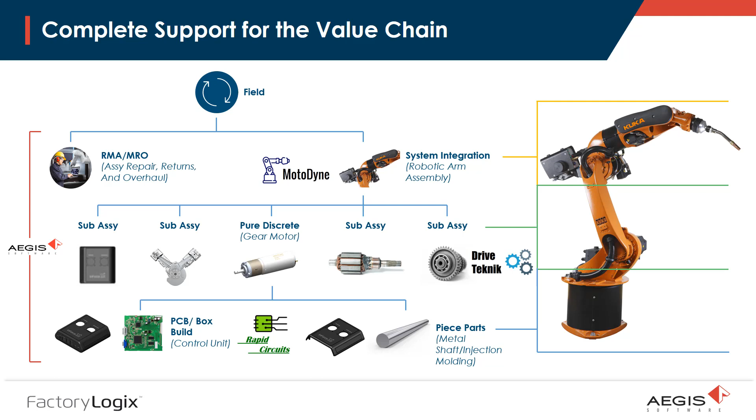And we'll get into a little bit about the nature of these companies in a moment, but we will be ultimately constructing that robot arm shown on the screen right now. And it will show how across 3 different companies, subassemblies come together, ship to another factory, and are integrated, and all the ways that FactoryLogix would support this model.

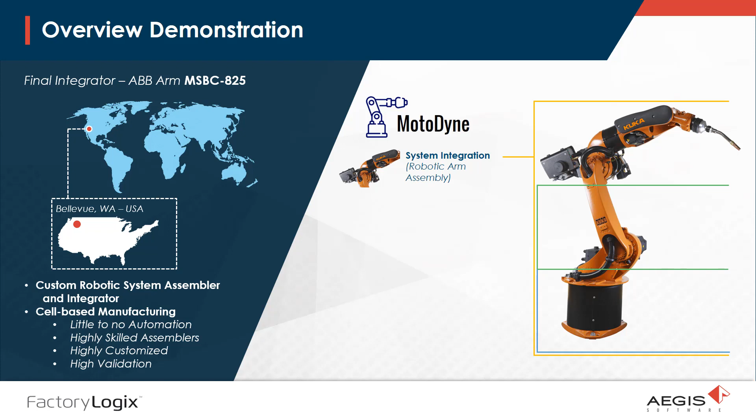So moving to these fictitious companies that I mentioned, the first is Motodyne. They're a system integrator that is focused on larger scale manufacturing of subassemblies that arrive to their factory to make the final product. They don't have a lot of automation. It's a highly skilled environment, and validation of the final assembly steps and traceability is important to them.

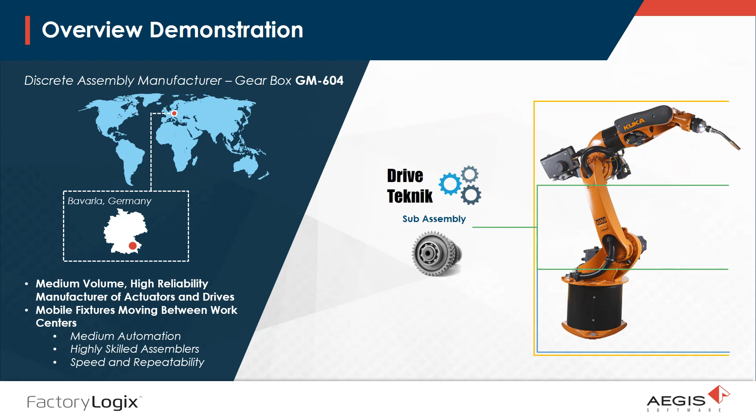The next company is Drive Teknik. They are a German company that's focused on drive and servo assemblies. They have a medium level of automation, and their assemblers are very skilled, and repeatability of the process is highly important to them for quality reasons.

Lower in the value chain is the EMS provider, Rapid Circuits. They're a PCB and box build, higher volume manufacturer in Mexico, and they have high automation, obviously, for circuit card. No automation in box build, and they have quite a bit of turnover in their labor force, requiring a high level of operator support.

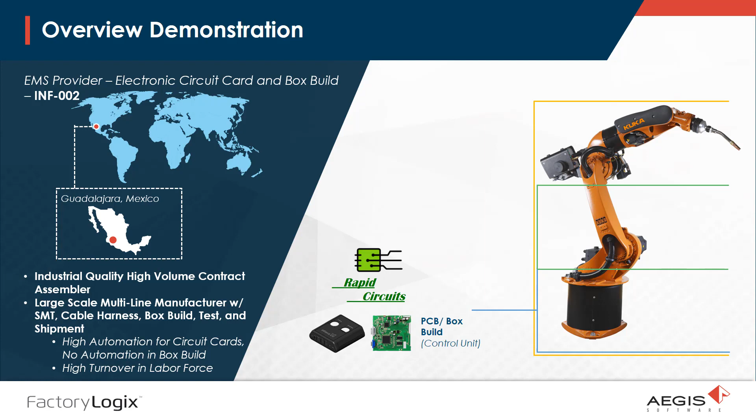As we go through the presentation, we're going to be coming back to this solution overview that you've seen before in the business presentation, but we're only going to be using this as a placeholder. As we move through the demonstration of the product itself, we'll come back to here to discuss a certain area of the solution as we move through. We're going to begin the demonstration with the manufacturing execution interface that would actually be used on the shop floor.

The FactoryLogix system design was intended to provide shop floor operators all the information they could possibly need in order to do their job effectively and efficiently with a single scan. So with one scan of the unit in front of them, if they're in a serialized operation, it presents to the operator a configured GUI that's laid out in a manner that's appropriate to them. So as simple or as intense as the manufacturing engineers wished.

It brings up the right revision of the document set that they should be seeing. It knows where they're standing physically, so it brings up the right documents for that location in the route. It knows the right operator, their certifications. It confirms whether they have the right tooling in front of them, as well as the chemicals and the parts and absolutely everything they require.

And it does not add any ergonomic or transactional overhead to what they would be doing anyway. And yet, as a result of the activities, the natural byproduct of what they're doing, the business gets what it needs without the operator even realizing that's occurring. All the trace, the control, the visibility, the enforcement of the route is simply a natural byproduct of running the system. So there is no additional transactional overhead.

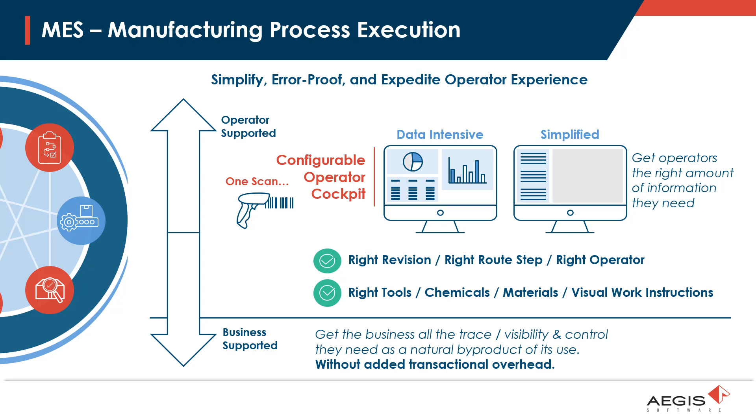So if we can move on to the demonstration and show you what the experience is, if you can just imagine now we're an operator on the shop floor, and the product moves in front of the operator, and they simply scan it. So as we can see in this interface here, imagine for a moment that you are the operator in the box assembly area of Rapid Circuits in Mexico.

The visual aid that you see in front of you has a video of the assembly operation itself, and of course other systems can provide that as well, or a JPEG or something of that sort. But what I'd like to direct your attention to is actually surrounding the visual instructions, because there's something very unique about FactoryLogix in that regard.

The content you're seeing in this view is dynamic. At the left, we have the steps, activities, and confirmation steps. Below it, you have a bill of materials block that's color-coded, and you notice the colors link to the bounding rectangles around the parts themselves. This is not typed in by a manufacturing engineer at some time. These entries are actually dynamically linked to the bill of materials.

The database upon which FactoryLogix sits is actually adaptively linked to these entries, and that automation goes further. That drawing header at the bottom was actually engineered in the manufacturing engineering tool. It's a collection of rectangles and JPEGs and so forth, but the text entries in large part are also dynamically linked to the database of FactoryLogix.

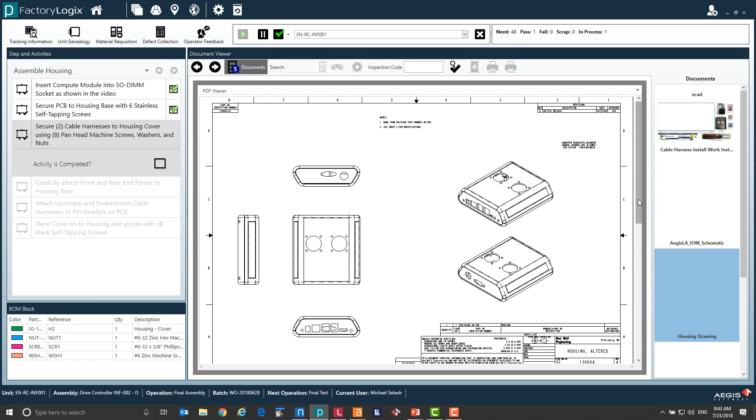Now, in addition, visual aids and work instructions are not the only thing an operator needs in order to do their job properly. All manufacturing companies have supporting documentation, such as standard practice instructions on how to use Loctite, or the specifications for a tool or a chemical, or in this case, say the operator thinks there's something wrong with that housing and needs to actually get the spec control drawing for that plastic injection molding and measure.

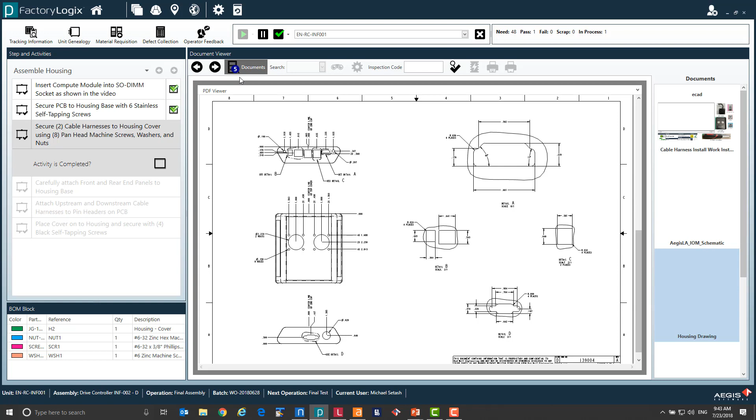They can just instantly go to the document vault that FactoryLogix presents to them at the upper left, with the 5 on it, indicating that there are 5 additional documents that were not developed inside FactoryLogix. FactoryLogix is acting as the vault to present it at the point of use where it would be most needed by an operator.

So now we were at Rapid Circuits. Now imagine that electronic and box assembly has gone out to the loading dock, to a shipping dock, and it's on its way up to Motodyne. That's the system integrator that builds the entire robot arm, and they have to incorporate that.

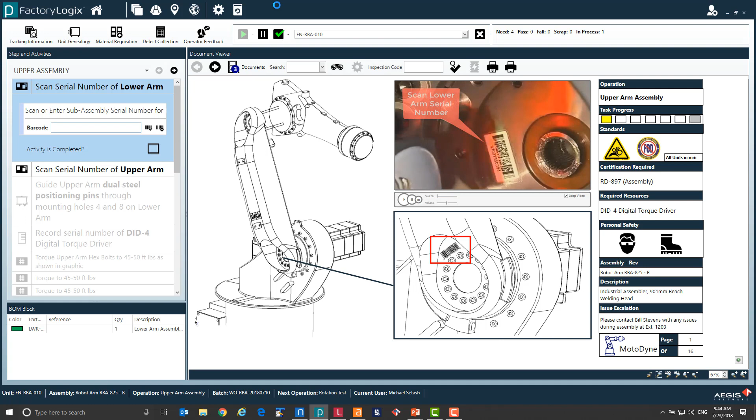So now imagine we're up at Motodyne in the Northwest United States, and we are now an assembly operator in a very different type of factory. You might note the user interface on the FactoryLogix shop floor portal is entirely different for this particular type of assembly. They're moving large objects around that have to mate together, and they have to confirm that a subassembly is the appropriate one to be docked into an upper level assembly, in this case that upper arm into the lower arm.

So the operator is guided with the video, of course, and some interactive instructions with the highlighted area, and they're guided through the scanning of one unit into another, which generates the hierarchy of the traceability.

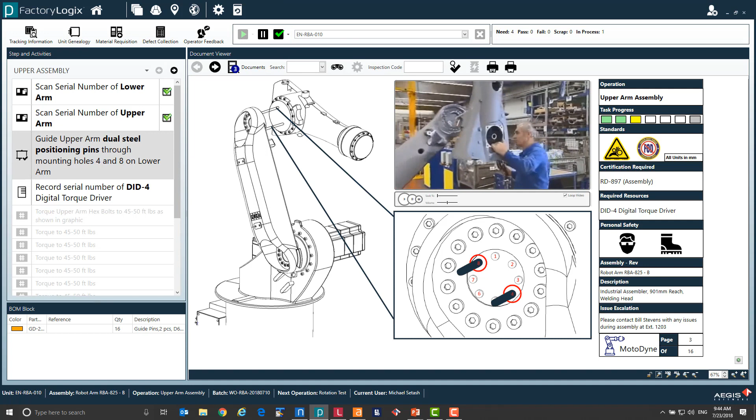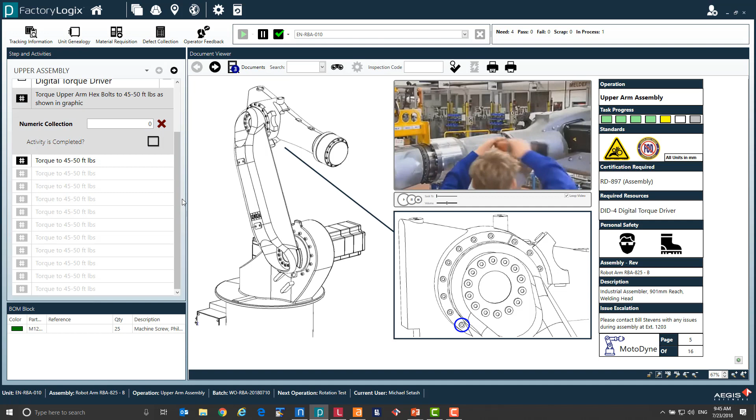In addition, this operator is being asked to confirm the actual tool, the torque driver in this case, that they used to fasten the two parts together. Once the proper tool has been confirmed, it guides them through the torquing operation, and further still, the actual unconventional nature of that torque pattern, which one would think would be a cross torque, but in this case they specifically want it to go around the circumference of the flange.

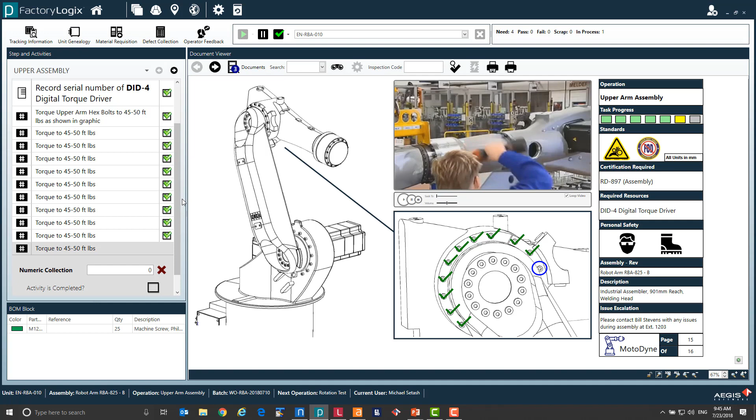So the system is doing a lot for this operator, making sure they're doing the right pattern. It's confirming that the torque values coming from the electronic driver electronically into our system via an IoT connection is all correct and within tolerance. And without the operator knowing it, the entire device history record and all the traceability is being compiled in the background.

Now we're moving on to the FactoryLogix QMS system. The approach of FactoryLogix to helping a company get to world-class quality was engineered such that it helps you tackle what we believe to be the three main obstacles to getting to that level of quality on one platform. The first area of the QMS system involves firewalling the manufacturing enterprise from quality issues related to non-conforming material coming in through the loading docks, so supplied material quality.

FactoryLogix excels in the area of incoming material quality because it handles the fact that most companies are either oversampling or undersampling incoming material, since the overhead involved in adaptively tweaking sampling rates based on supplier performance is very hard to do manually. There's also overhead in finding the right inspection documents and knowing the key inspection criteria. We're going to show how FactoryLogix overcomes those primary problems in incoming material docks.

The next area is variability in process or test that results in a nonconformance as you're manufacturing. This involves detection, identification, repair, and recovery from defects found during test or the course of the process, logging nonconformances in a visual manner, and test and AOI data acquisition—everything involving quality issues found while production is actually going on.

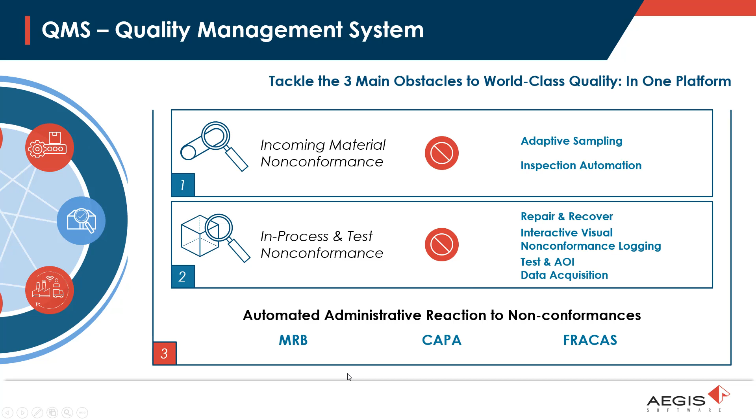Now we'll go into the FactoryLogix quality system itself.

As with all other areas of the shop floor experience, in this case for an inspection operator, they need only scan the ID of the product, and everything required to do their work comes up in the FactoryLogix interface, as you see here. This interface looks different from the others we've seen in prior demonstrations—it's been laid out by quality or manufacturing engineering for the specific purpose of inspecting a mechanical drive, which is depicted here.

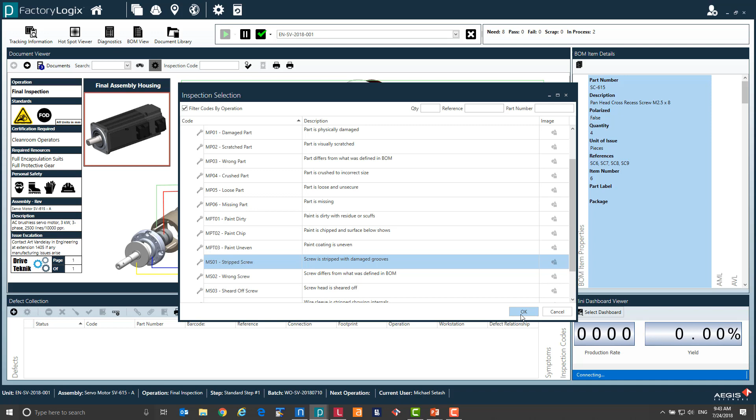Unlike other quality systems that expect operators to log nonconformances and defects in forms, edit boxes, or drop-down combo boxes, FactoryLogix enables placement of the product image itself associated to the parts. The mere act of clicking on the part opens a defect code list. This isn't just the master defect code list of the company—it's filtered by this point in the assembly process, so only appropriate defect codes are presented. For example, if coding of the drive hasn't occurred yet, coding-related defects simply won't be presented, which expedites data logging and eliminates erroneous defect input.

Another advantage of having the actual visual to log defects on is that you can place geographical defects down, such as a housing dent, ding, or scuff, which was logged here. This allows you to later see where the problem was located when rework, repair, or an MRB meeting occurs. Notice at the bottom that the act of logging those defects so simply generates a good deal of data the operator didn't have to log themselves—that list at the bottom shows all nonconformances collected with full details, and there wasn't a single use of the keyboard to do it.

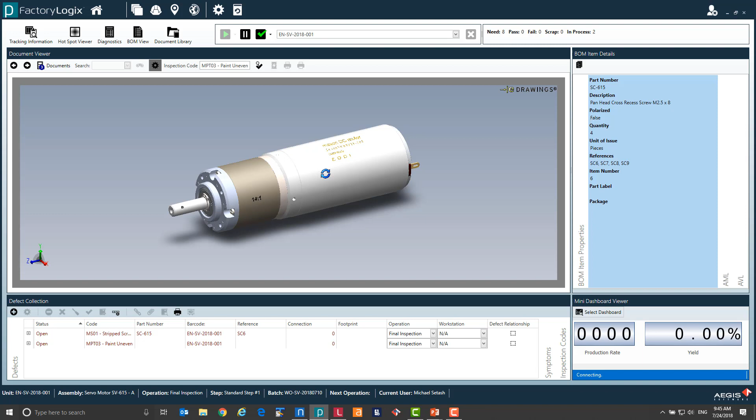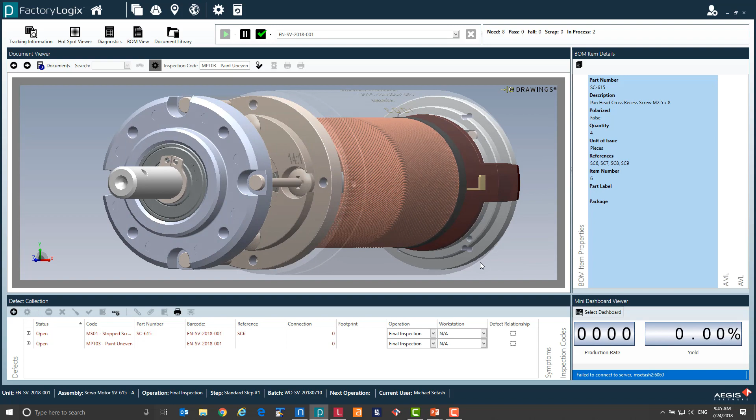In addition to the view we just saw for collecting defects, suppose the operator needs to examine the product in greater detail. They can go to the supplemental documents button at the upper left and bring up the actual 3D model of the product, expand it, make it transparent, examine it in greater detail, and then go back to the other view to log defects. Spec control drawings and other details could also be brought up at this time.

Now let us imagine that we are no longer at Drive Teknik, the drive manufacturer in Germany. Now we are back at Rapid Circuits in Mexico, where the circuit cards and the box build was being done, and again we are a line operator scanning a unit in front of them.

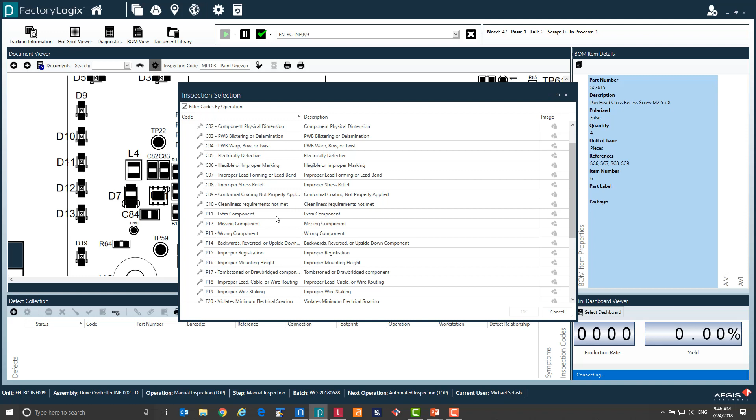But we're going to show this because it shows that in a circuit card environment, which is actually from a data perspective an even more difficult data logging and defect logging challenge, FactoryLogix shines because it is aware of the ECAD design itself. With systems other than FactoryLogix, collecting quality against a circuit card is again forms and data entry. And how could an operator be expected to know what pin number on a 132-pin device actually has a cold solder joint on it? None of that is a problem with FactoryLogix.

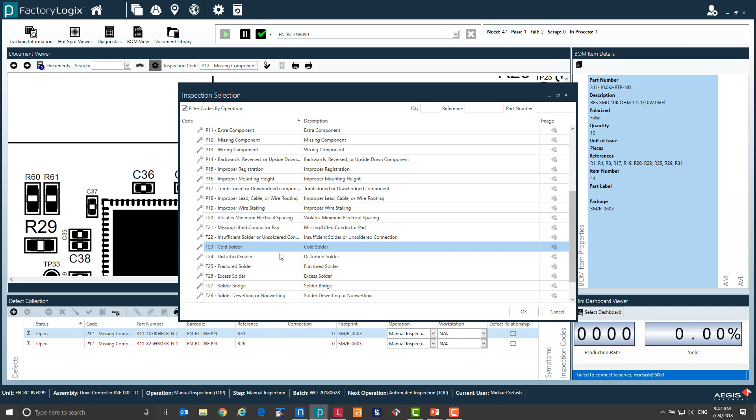As seen here, the simple act of dragging a rectangle around the offending pins, indicating the defect type, and clicking OK will generate a massive amount of absolutely accurate data about those defect types, the connection points, the pins, the footprint, the package, everything. Imagine logging that manually in another system - it would either not be done or be highly unlikely to be accurate at all, and it would take a great deal of time. But with FactoryLogix, it takes very little time.

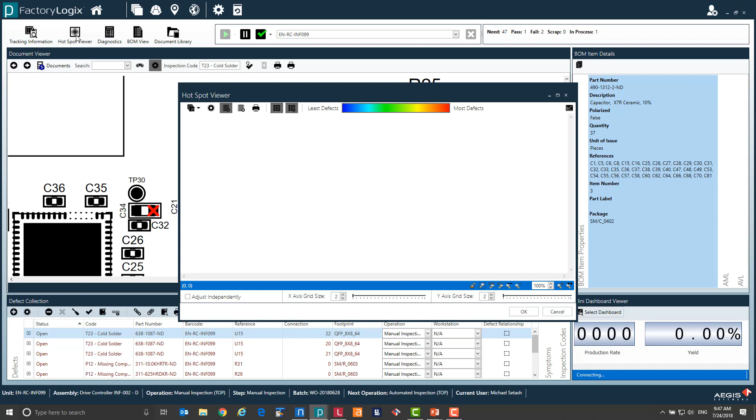But there's also another benefit beyond the accuracy and depth of the data: it's the geometric or positional nature of the data being logged, whether it comes from a human or an optical inspector - it's the same. The benefit of that is that in circuit cards, defects are often positionally related. There could be a striping effect across the board, or a certain area with a high concentration of defects due to a design problem of component spacing.

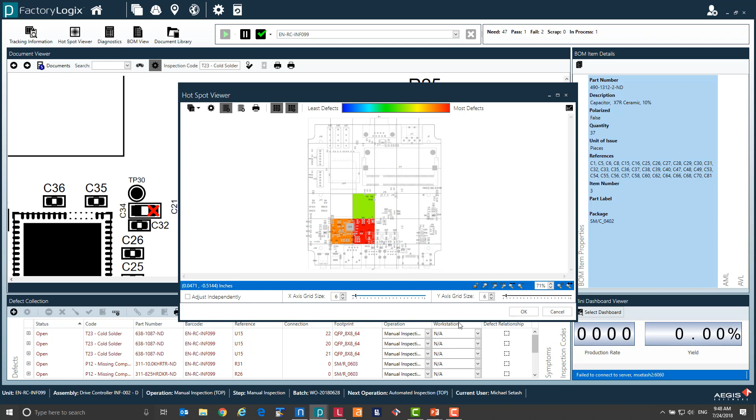The fact that data is logged against the product design itself in FactoryLogix enables what we call Doppler radar for quality, where you can actually see the frequency of defects within locations and color code the surface of the product to do an even greater level of quality analytics.

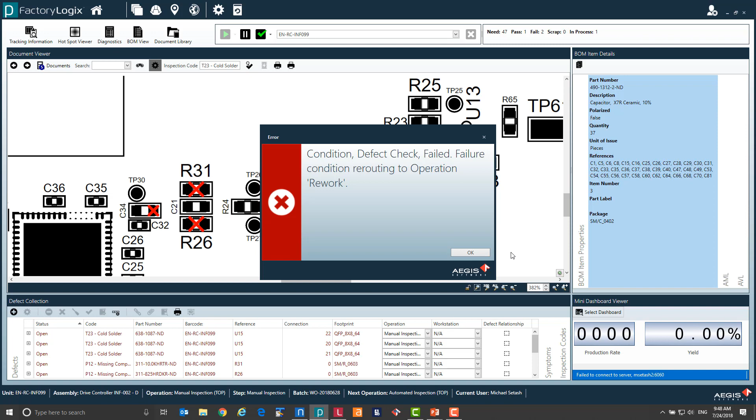Now, as this logging is going on, let's imagine that in this environment at Rapid Circuits, quality engineering or manufacturing engineering had set a threshold for this particular type of defect that, should it occur, justifies a much greater business reaction - such as sending it through a material review board, a corrective action, assigning preventive action, and so forth. So what occurs as a result of that logging is an email just went out, informing possibly a large group of people that we have to do something about this to correct the business and ensure it does not occur again.

The simple act of selecting the GRN that was assigned by ERP for these incoming materials automatically launches this user environment. This would come up in front of the inspection operator in the warehouse, and at left you see the key inspection criteria for this particular part. It guides them through those inspections.

In this case, there are radii that need to be measured, checking whether they're in tolerance, then the shaft length and so forth. But what you might notice at the right is you can develop essentially visual work instructions for the act of inspection as detailed as you'd like. All the power you saw in the shop floor production documentation engine of FactoryLogix is available here as well.

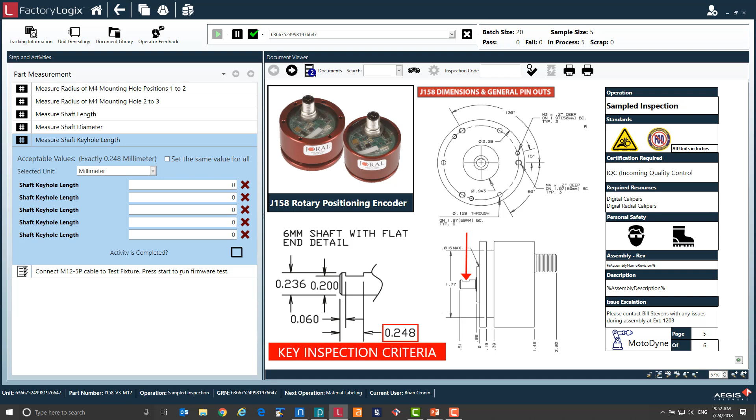As you can see, it becomes interactive. You click on the next step, the arrows and pointers change to show exactly what they need to do to inspect this product.

Also, should the inspector want more than these visual work instructions, supplemental documents - in this case the actual vendor's spec control documentation - comes up, so if they need to dig into even more detail about what to inspect or what the limits are, they can do that as well.

But what the inspector doesn't even need to worry about in the background is the issue of sample size. FactoryLogix's active rules engine is running in the background, running the algorithm that was selected by the quality or manufacturing engineers for this particular product. In this case, the batch size is 20, and it's indicating that only 5 need be sampled.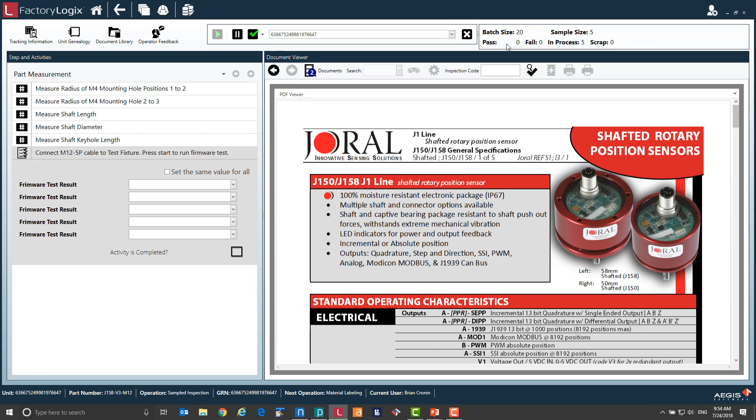Depending on the configuration the customer chose, if a single one fails of that sample, it could be programmed to fail the entire incoming lot, or it could tighten up the sampling, increasing the sampling rate. All manner of things can be done automatically, but the beauty of it is those doing the inspection don't need to worry about it. It fully automates it, enabling them to sample as little as is prudent within the switching plans assigned by engineering that the inspectors probably don't even know about.

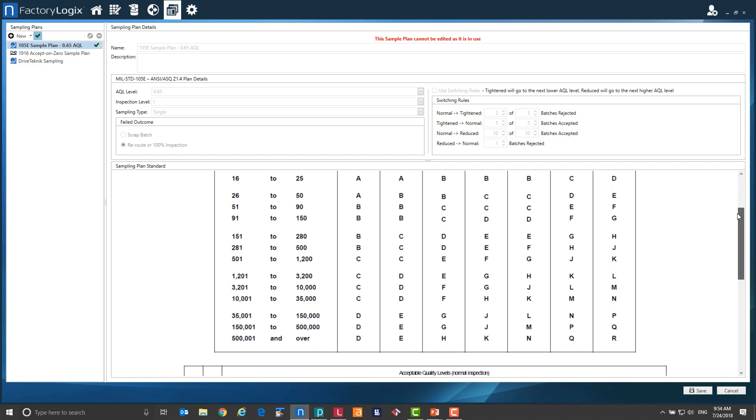So if we go over those sampling plans for a moment to give a little more color, this is the user environment used by quality or engineering to actually set up the plans. Generally accepted ones, some mil-standard ones, switching rules are loaded in there, but then they're highly adjustable within them. You can see that the depth of options and switching rules that can be applied to a given incoming inspection is rather deep and sophisticated.

But the objective from a business perspective is to inspect enough to ensure high quality, but not over-inspect, which is a waste of money and time.

The next area we come to involves FactoryLogix lean materials management. The design intent of this area of the system is to resolve a classic conflict that occurs in most manufacturing enterprises between finance and purchasing and operations.

That conflict relates to the fact that operations management wants to keep production moving as efficiently as it can, with asset utilization maximized as much as possible. In order to do that, in many cases what fights that goal is they run out of materials - they have material shortages. So the response to that is a desire to have more materials on hand than is technically required. That's operations' goal, in order to keep their lines running.

But then you have finance and purchasing. For very real business and financial reasons, you want to have as little inventory on hand as possible to meet the goals of the factory. But those two goals run in conflict with each other because, frankly, of the way ERP typically handles material, which is push-based out from the warehouses to the floor.

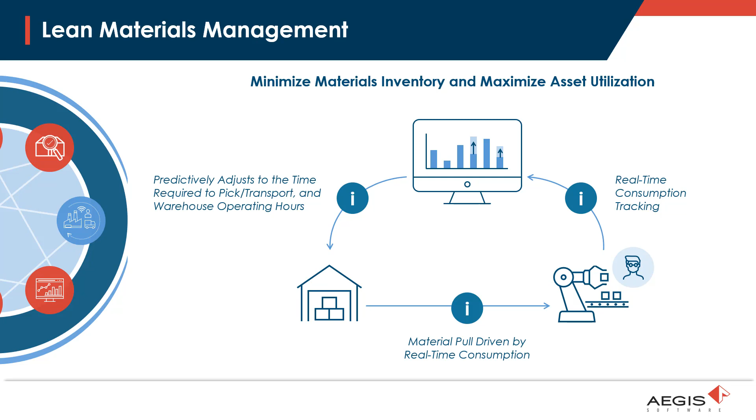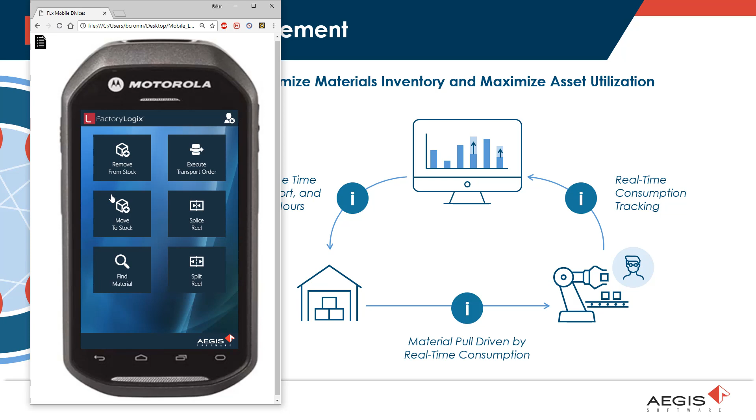And we can't really demonstrate this entire solution because we don't have a factory right now, but what we can show you is an element of it, which is our materials logistics interface, which in this case is represented on a mobile scanning device, and the HTML5 interface is displayed here. What the operators moving around the warehouse would see is this user interface, and they are constantly getting refreshed what we call transport orders, which is what should be pulled and the destination to which it should be sent.

So it guides them through the material kitting and the transportation to individual locations in the factory floor or local material stores or what have you. So this interface is being used by many operators in the warehouse, and it's a pull-based drive of materials from warehouse out to the floor, ensuring that balance of utilization and minimization of materials is achieved.

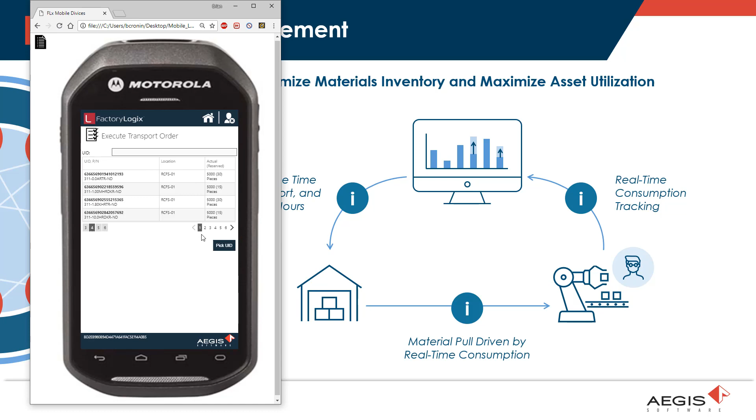Now we come to how FactoryLogix supports regulatory and customer compliance. Any company that either has significant customer demands for trace and all manner of data, or is involved in an industry or a vertical that has regulatory demands like defense and aerospace, safety requirements in automotive and so forth, or medical, you are already achieving these deliverables in terms of data and reporting to whomever is demanding them. You wouldn't be able to function as a business if you weren't.

So it isn't as if FactoryLogix is doing something that you don't already do. It's a matter of how accurately, easily, cost effectively and simply it achieves it. And that's where FactoryLogix really can add value in the manufacturing enterprise by making all of your audit support, your certificates of conformance and compliance documentation a matter of a simple click, even to the level of shipping with a lot of these documents, which we're about to show you.

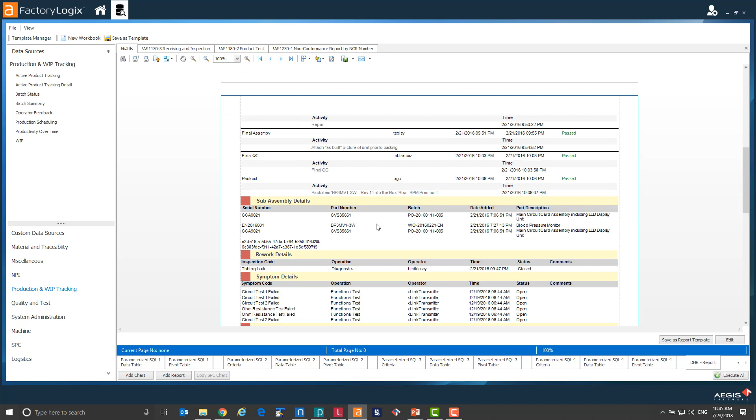In keeping with the customer compliance and regulatory industries that require such reports, as a natural fallout of everything that you've seen so far, FactoryLogix will actually generate some of these reports that I'm about to show you right now. For instance, this DHR or device history record, which is a rather comprehensive as-built device history report showing the route steps and operations that this particular unit traveled through on its way to completion and the status as it went through. All of the traceable subassemblies that were joined into this upper-level assembly.

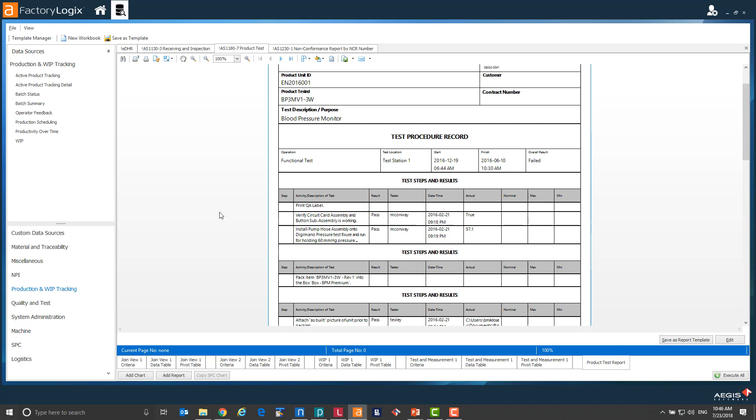And taking that further, we have some of our AS9100 style reports. This particular one for receiving and inspection speaks to an IQC process where we sampled 12 pieces from a 50-piece lot and performed certain measurements and tests. Product test as well, the actual product we were speaking of during our QMS portion of the demonstration. We spoke about inspections that can be performed in an automated fashion or manually.

Again, as a natural fallout of just using FactoryLogix, all of this information and these types of reports can be generated, and in fact, they can be generated automatically. Once an assembly or a device reaches a certain point in the route, these reports and outputs can be generated automatically and included with the traceability data that's provided to the customer. So I think it's important to point out that all of these reports are simply included during a normal deployment of the FactoryLogix software.

We now come to FactoryLogix Adaptive Planning Engine. Now, planning in manufacturing is one of those words. If it's said to 150 manufacturing professionals, there'll be 150 different opinions as to what planning is. So it's important that I frame where this module in FactoryLogix fits in the grand scheme of the issue of planning.

ERP and other systems that bolt to ERP are varied and many of them available, and they're very good for long-term planning. ERP is connected to the supply chain information and many other things, and it is very good for long-term planning. But where those tools typically stop in terms of the depth of their capability is that they are not connected to the detailed information about the real-time asset run rates, detailed material location and attrition rates, everything that's happening on the shop floor, the line availability at the moment.

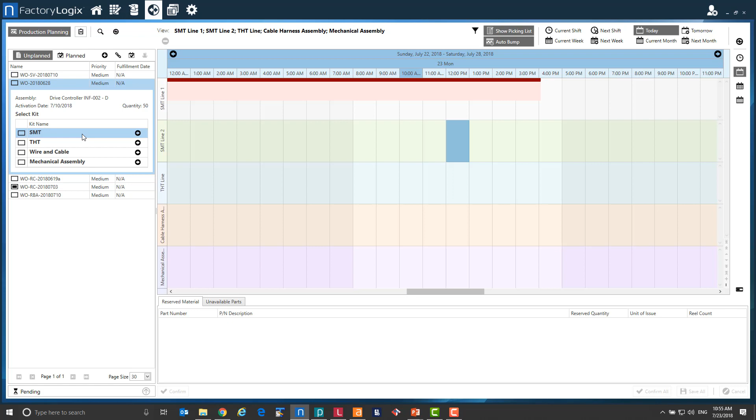So over here on the left-hand side is a list of all of the batches that I currently have outstanding, and in this particular batch, this is the one that the program manager is screaming about, I need to jam into the schedule today. What we can do is, with a simple drag and drop environment, we can drag these individual sections or discrete portions of this job, in this case all of the surface mount work that needs to be performed first. And just by dragging that section of that job onto my schedule, I have immediately and automatically calculated the amount of time that that's going to take. You can see that's going to bring me into approximately 11:30, 11:45 on Wednesday.

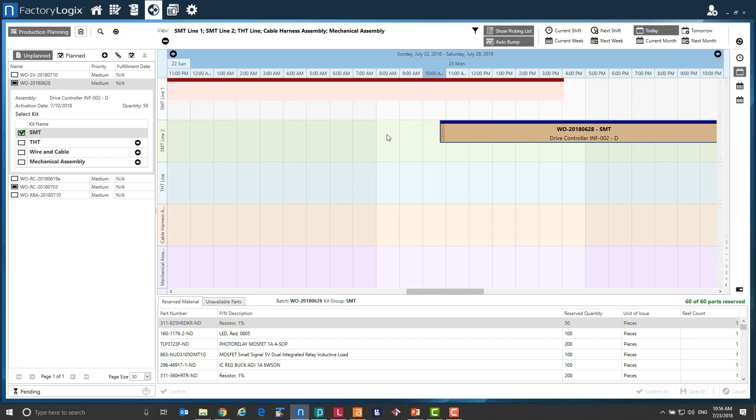And the color coding that you see here in that beige means that this is now scheduled, and my materials, all of them, are reserved. 60 of 60 parts were reserved for that portion of that work order or that batch. If I do the same exact thing for the next section of this work order and drag the through-hole portions, the color coding is different. You see a gray bar, and you see the notation down here at the bottom. 11 of 12 parts were successfully reserved, meaning that I am missing some parts. There are parts that are, for one reason or another, unavailable to me for this particular work order.

Now, the beautiful thing about FactoryLogix is that we can very immediately resolve and determine why these issues are occurring, and perhaps even have some solutions suggested to us. For example, if I double click on this entry for this missing part, you can see that I have two potential solutions. Number one, we have an alternate part number that was found. The bill of material for this particular work order is calling out this 14323CT. However, we have a viable alternate part number, 14323CU. And just by checking that box, I can then resolve this shortage by utilizing an alternative part with just a simple click.

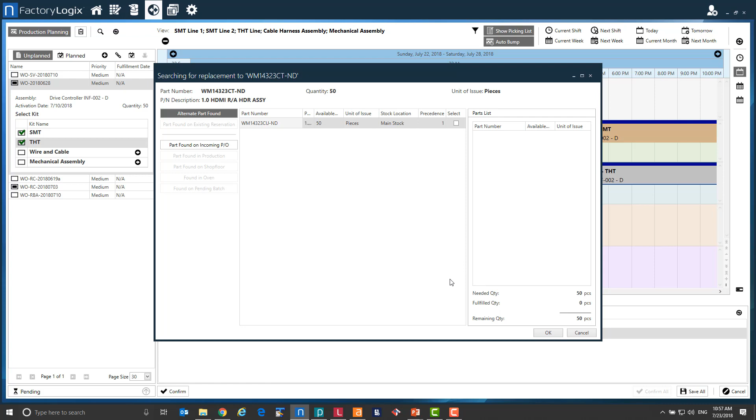In addition, you can see that the part is found on an incoming purchase order. It was due onto the loading dock on Friday, July the 6th. So we have a little bit of a back order here from our vendor. Perhaps that's sitting on the loading dock, hasn't been brought in yet. So I have two different solutions to this potential problem. The near term and the adaptive planning is what we're after here.

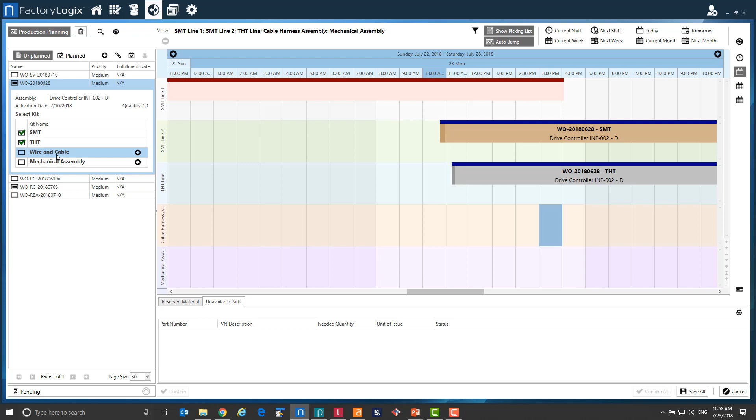And finally, the assembly hierarchy is known to the system. So when attempting to schedule a portion of this assembly prior to its subs being completed, the system will actually prevent you from doing so. So in this particular case, it's telling me that the wire and cable portion of this particular assembly cannot be scheduled prior to the surface mount portion of the assembly being completed first.

FactoryLogix incorporates a module that we call digital manufacturing engineering. This, in many cases, would be called the new product introduction section of the system, as essentially that is what it does. But we find it important to differentiate from what PLM and the R&D platforms consider new product introduction. And this actually, in a way, will explain where the DME module fits into the manufacturing world.

When the customer's R&D group or your own R&D group go through the process of getting a design ready to go to production, they call that new product introduction. Getting the CAD done, the prints, the bill of materials, getting that all under revision control, and everything that defines the product is NPI to them. However, those in manufacturing know that even when a perfect NPI from R&D is complete and handed over to the factory, you can't go to production with that. That's not adequate to start building the product.

There's an awful lot of work that has to be done from that point forward to take the design and the BOM and make what's often called the manufacturing work package, which includes the quality plan, the route and the process the product will go through, the logic decisions, the look of all the visual work instructions at every station that the operators would need, the entire support of the manufacturing process and its operators and the machines. Everything that's required is a great deal of work to build, and that creates a work gap from what R&D considers released to production and what actually can be released to production.

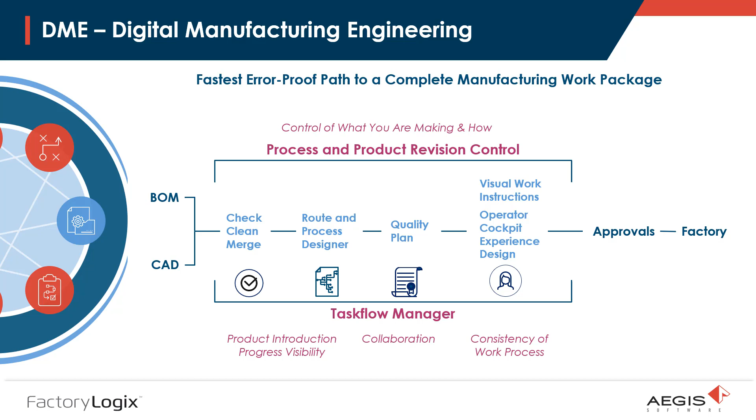The Taskflow Manager solves both those challenges. It's basically analytics for the manufacturing engineering office, showing who's working on what and how far along they are. But it also provides a framework, almost like a wizard process, to send manufacturing engineering down the best practice task plan to get a full work package done, which brings consistency to the work packages that are going to the floor. And all of this is firewalled from the factory through electronic approvals. So nothing that didn't go through approvals can possibly launch to production. So what you're about to see is the engine that would be used by manufacturing engineering in the office to develop a work package.

Now this is the interface here, the DME interface. And first, as mentioned, the process revision that's subordinate to the design revision is shown graphically in the tree. So this typically would grow to be a very large tree. The process revision is what defines how the product's built, and what's being built comes from R&D, and in this case is Rev D. So that's the first thing we wanted to show.

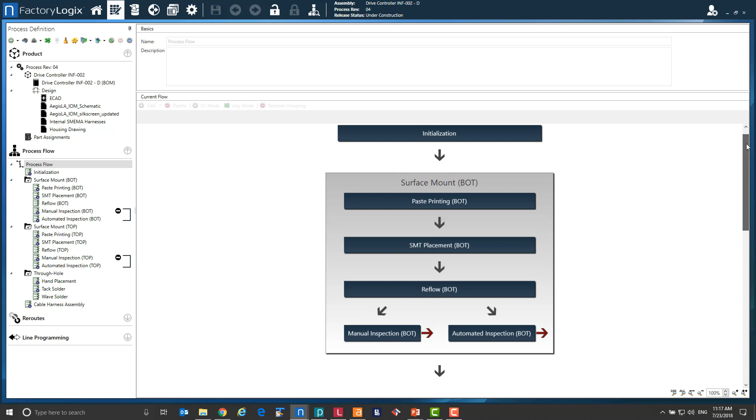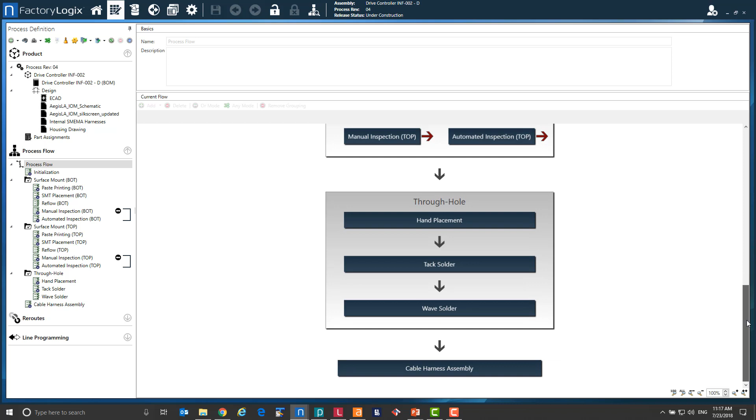But going into one of the process revisions, what you're seeing now is something that is used solely by manufacturing engineering. It's sort of a setup portion of the system. But what you're looking at, both in the graphical rendering of this flowchart and the tree at the left, is the FactoryLogix process modeling system. That flowchart is not just a picture. It's actually dictating the algorithm and the logic that would be activated on the floor as production was running.

So if one of those processes is dragged to another location, it will automatically update the sequence. If multiple stations are selected and an attribute like any order is set, it will actually show that, well, these two processes can be done in any order. They're not sequentially dependent upon each other.

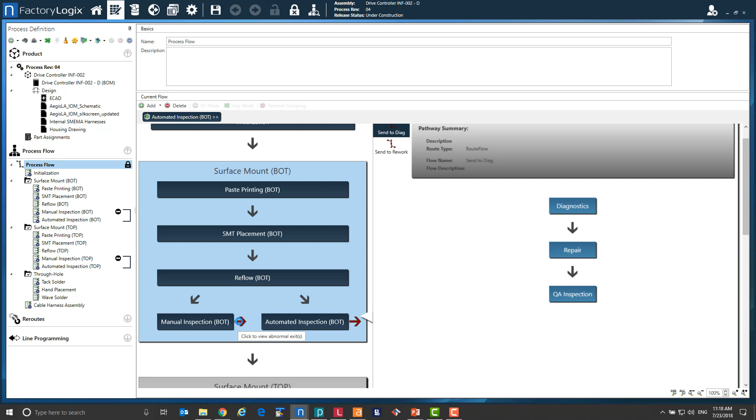And also further, if we look at the red arrows at some of those inspection points, that's an abnormal exit condition. So if you click on that, the engineer could actually design an entire other flow, which then itself could have logic in it. So extremely complicated and comprehensive logic flows through processes can be engineered completely graphically. And these become templates that are then applied to different projects in the future.

However, I want to note something that Aegis at least believes is probably the most important technical achievement of the FactoryLogix design, and one that we do not believe exists in any other MES offering. And it is actually graphically manifest here before you in this view. Most who are observing this to this point probably thought this was a routing across assets and stations and lines in the factory. But in fact, it is not. What it is, is a process model.

FactoryLogix's design is a result of us realizing with our prior generation product that was in the field for 15 years that if an MES system makes a one-to-one relationship between the process and the physical world, meaning the assets, the machines, the routing itself, and then you link that one-to-one with the process that the product has to go through to become complete, you lose flexibility and any hope of things like emergency line switching to another line mid-production, configure to order that adaptively adjusts a process across different locations and routes in the factory

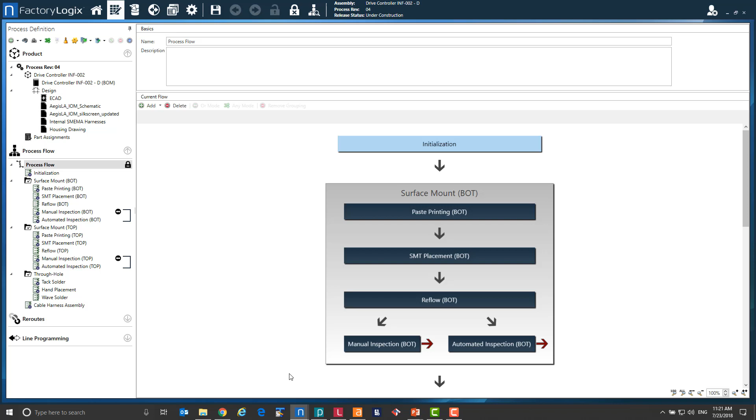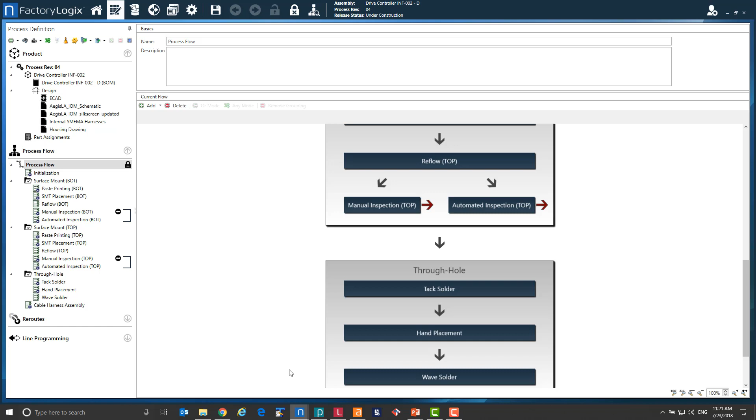What you're looking at is the process flow, as I mentioned. The act of planning a job is what applies, and the product. So you take the product, the process model, and the act of planning, and those three things merge together to go to production in a given factory or a given set of lines at that time. So everything comes together only at the time it needs to be produced. That makes FactoryLogix unprecedentedly flexible and adaptable to different factories, different products, different assets, and all sorts of emergency conditions. So as mentioned, this is done one time or very seldom, the setup of the process.

But what would the manufacturing engineers actually be using when they're building the work package, so to speak, the visuals that would be built for the floor? And that's what we're looking at right now. You might recall this view from our former demonstration of the MES portal. Well, what we're looking at right now is what was used to build that. It's a graphical construction environment where you have all manner. You can see at the ribbon at the top.

You see all sorts of graphical tools, arrows, eyeball views, shading, and just what you would generally expect in a graphical editing tool. But you also have the ability to insert text, rich text, or smart text. Those are text fields that are, as I mentioned before, drawn from our database. So that drawing header down there, that's a collection of rectangles and text, the text entries are actually smart text that is looking to the database to auto-populate its content.

The manufacturing engineers can also preview what the user interface would look like for the operator on the floor from here. So they can build very rich interactive instructions through this environment and then apply them to different process stations along the routing.

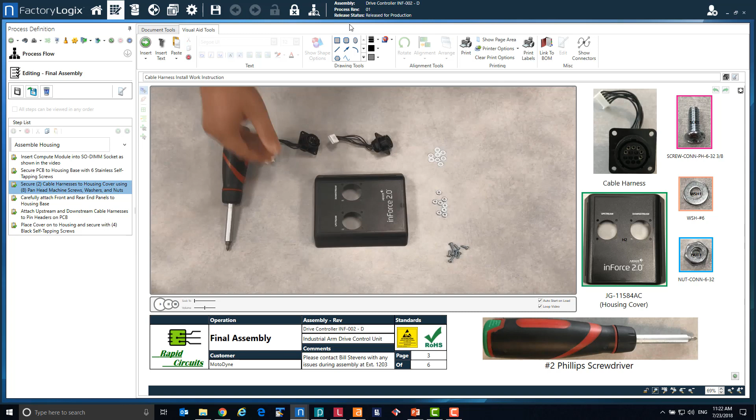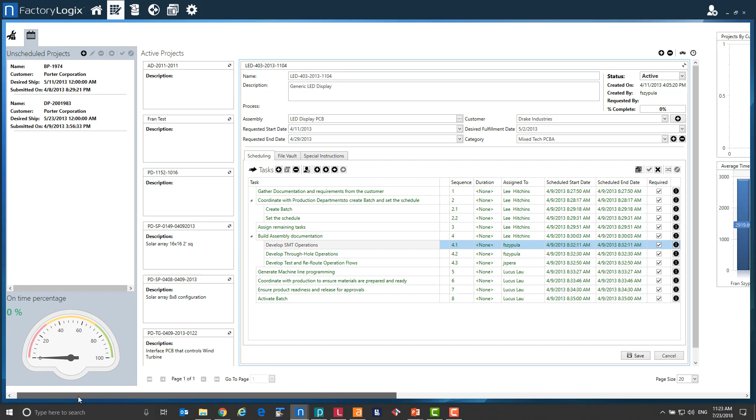As I mentioned in the introductory slide for this digital manufacturing engineering interface, there's the task flow system that's used to monitor, track, and guide what's going on in a manufacturing engineering group. This is the interface we see here, which is basically the scheduling of tasks across people, who has to do what in order to get that work package out to the floor.

But it also has an entire analytical engine, which you see here. Manufacturing engineering management can literally see the utilization of the engineers, who's overloaded, who's underloaded in terms of getting things done, what's the on-time performance, how close are we to getting something launched to production. So it becomes an entire engine to really know, without having to go around and ask people, what is going on in all the work to get engineering changes out, deviations, and initial product launches out to the floor.

Now we come to FactoryLogix support of RMA and maintenance, repair and overhaul. We can't demonstrate this in the time allotted, but conceptually this links back to the very unique design structure of FactoryLogix, where the process is abstracted from the physical assets in production. That's why the ability to handle MRO in particular and configured orders is so elegant within FactoryLogix, because normal production is easy to model—you have a route, a flow through it, dictating what assets it's going through. It's a very simple model.

But things become a lot more complicated when you have a product coming back for repair and you don't actually know what the route needs to be, because you have to diagnose it, repair it, and get it back out in the field. So the route is ad hoc, or just in time, as we say. FactoryLogix literally lets you build a route in production on the fly in order to execute an RMA.

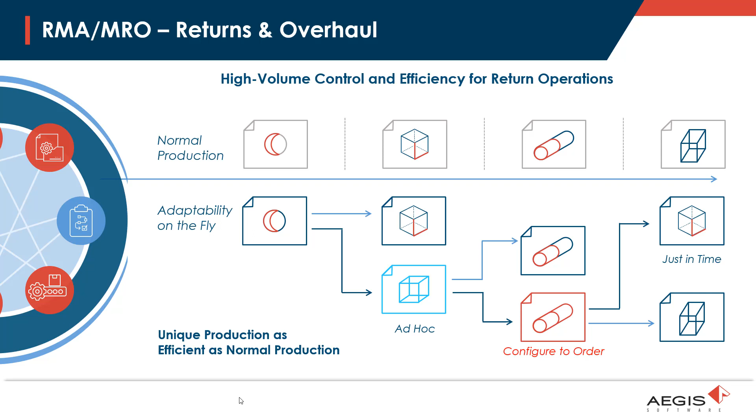So you have an environment that is a truly adaptable process, going beyond anything possible with a traditional system that's basically just one-to-one—this is the asset flow, this is the route, this is the process. With FactoryLogix, you're not limited in that way.

The final solution area we're going to cover in FactoryLogix involves manufacturing intelligence—components built natively within FactoryLogix for the purpose of enabling anyone in the factory to get the information they need from the system and turn it into insight. Rather than requiring the assistance of highly skilled software engineers, people with SQL expertise, or the IT department, and burdening them, the engineers, the quality people, whomever, can get the outputs they need themselves.

This system is comprised of a few main areas. The first is reporting and charting—the ability to generate PDF reports or dump data that was mined from the system into Excel, into a directory, and so forth, the traditional type of functionalities most would associate with a business analytics system. But in addition, there's a mobile interface called Insight that allows anybody with an Android or iOS device to get basic information out immediately as they're walking around with their mobile device.

And also, we have real-time dashboards. When we say real-time, it is literally such that if there are dashboards displaying, for example, the state of a machine in production, and someone opens a hood, the moment the hood is opened, the gauges and indicators in the dashboard will update. So they're truly real-time, but they too are also configurable by the end user.

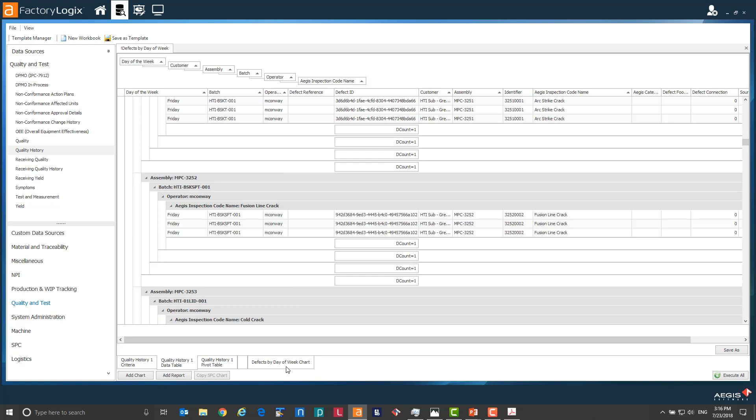And you go back to the chart, and you'll notice that the drill down has completely changed. So traversing the data now cuts the data differently and reveals entirely different things. Now we see, yes, there is one work order for that customer that is the offending work order. And when you drill into it, you see that a certain operator may be a problem. You can keep going back and forth, changing the drill down to look at this data anyway.

Now, we only took one relatively basic quality type diagnostic. But as mentioned, that toolbox at the left has many, many data generators, and you can apply the same methodology to every single one: drag and drop, interrogate the data, drill into it, and say this was the view that revealed the root problem that needed to be addressed by others.

It can be immediately snapped to a chart in PDF form and emailed out through the rules engine, or simply manually. So as we've seen here, the act of interactive interrogation and diagnostic of the data is simple, not requiring any special IT skills.

And snapping to the report. But what we've not looked at, we did see that dashboard he was looking at above the line. Now let's go over to how that dashboard came to be. It's similar in principle to what you saw with Data Miner.

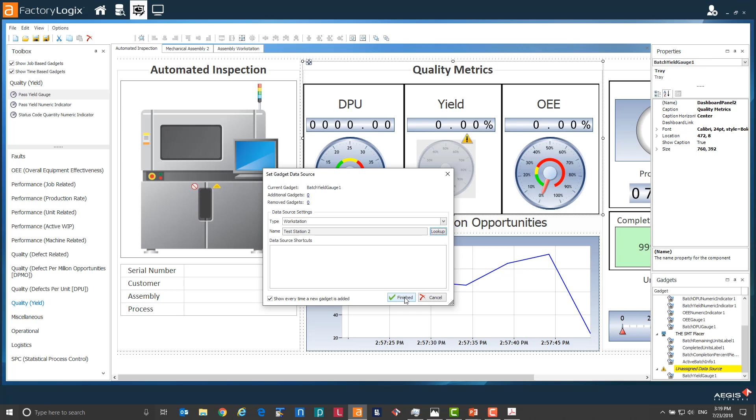Now what you're seeing there is drawn from the backbone of FactoryLogix, which is the asset list, the actual machines, sensors, and devices that the IoT data streams are coming into the back end from. So all one need do is click on the actual asset human readable name that was given to that sensor or machine. In this case, it's an inspection machine.

By doing only that, a huge technological achievement occurred in the background that the operator need not worry about, the engineer need not worry about. It just connected that gauge to a real-time data stream coming in from an IoT adapter to a machine on the floor. If he runs the real-time preview, it will actually be getting real-time data from the floor. It is that simple to do anything in an iMonitor dashboard designer.

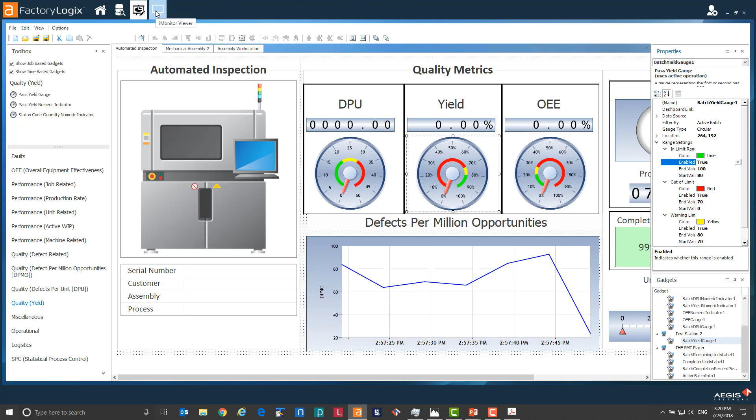However, there's more to this. In many cases, if you're using a dashboard on your desktop in your office, you might want to get more from a dashboard than just looking at the one we have here on screen. So what if you want a situation where you have a line level view, but then you want to be able to click on a machine and drill into more detail for that one machine, and then, like a website, keep going down the navigation? Well, how would you do that?

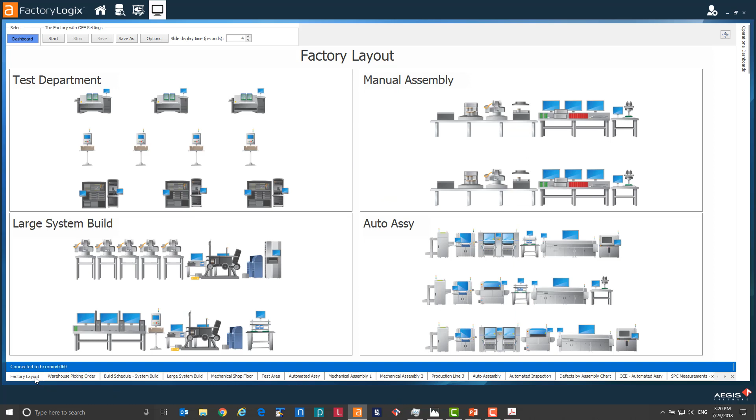With iMonitor Designer, it actually is done very much like a website, where any entity, any one of these gauges or indicators in this view can be hyperlinked to any other dashboard. So you can literally make an entire real-time website, effectively, of your dashboards, of your own design, and then put them against your user profile and have them available anywhere you want.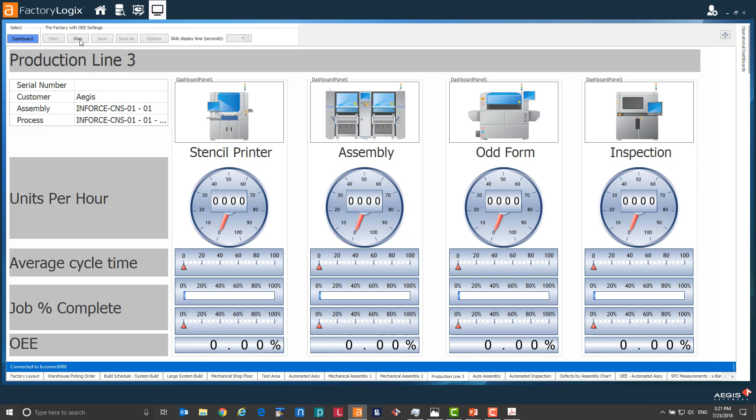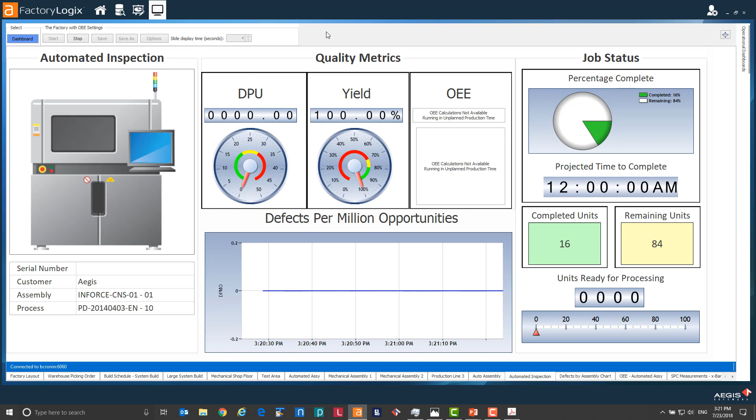So in summary, we took you through the scenario and also how unique it is that because the FactoryLogix manufacturing intelligence system is aware of the data model, aware of all the real-time event streams, and the architecture supports the IoT plugins, it is exceedingly easy to get any report, chart, diagnostic, or real-time dashboard that you could possibly want out of the system, without any particular software skills whatsoever or knowledge of the database. This puts the power to get analytics, reports, and insight out of the system in the hands of the people who actually want to do it, while freeing up the folks in IT so their efforts could be better spent elsewhere.